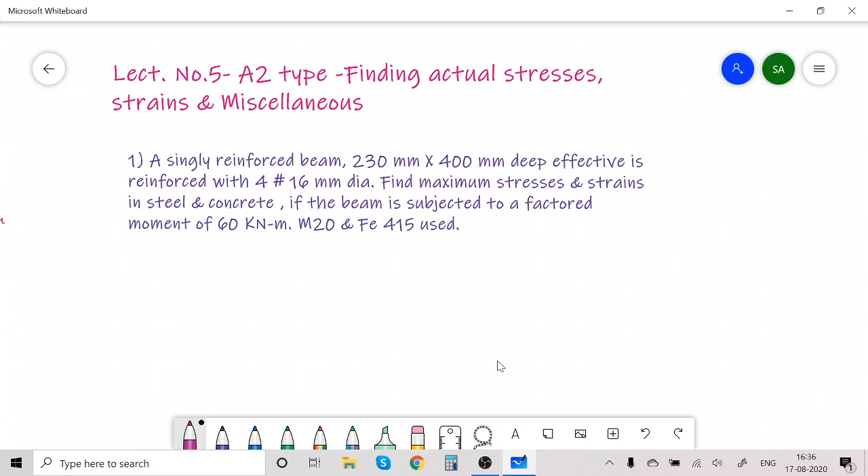Hello friends. Today in lecture number 5 of the subject RCC, we will study the A2 type problem, that is finding actual stresses, strains and miscellaneous problems. In the first problem, a singly reinforced beam 230 mm by 400 mm deep effective is reinforced with 4 bars of 16 mm diameter. Find maximum stresses and strains in steel and concrete if the beam is subjected to a factored moment of 60 kN meter, M20 and Fe 415 used.

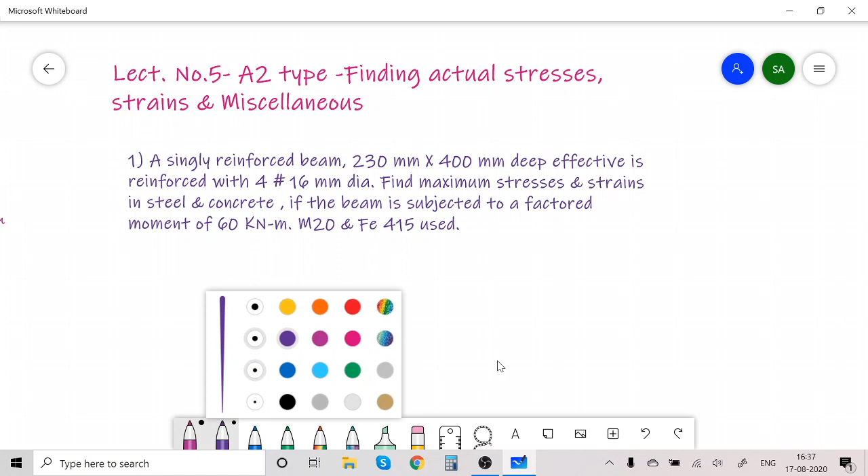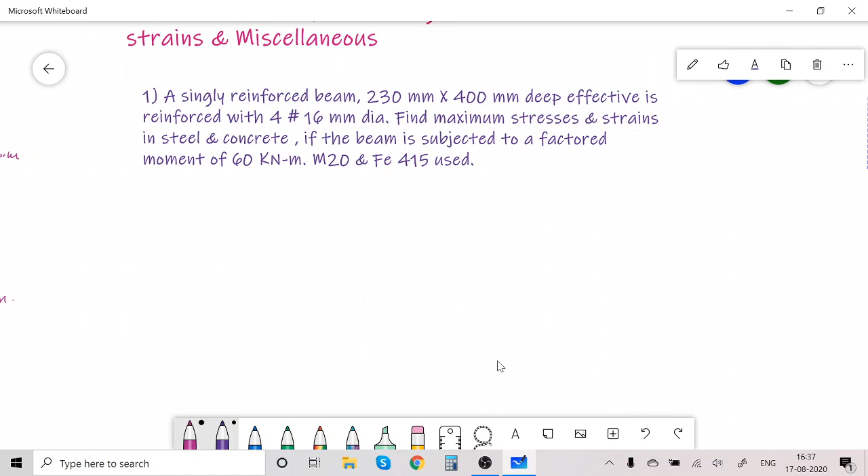Now, to start with, we will note down the given data. So, solution. Data given. B is 230 mm. Small d, effective depth, is given as 400 mm.

Is reinforced with AST, 4 bars of 16 mm diameter. So let us calculate area: 4 into pi by 4 into 16 square. So this is 804 mm square.

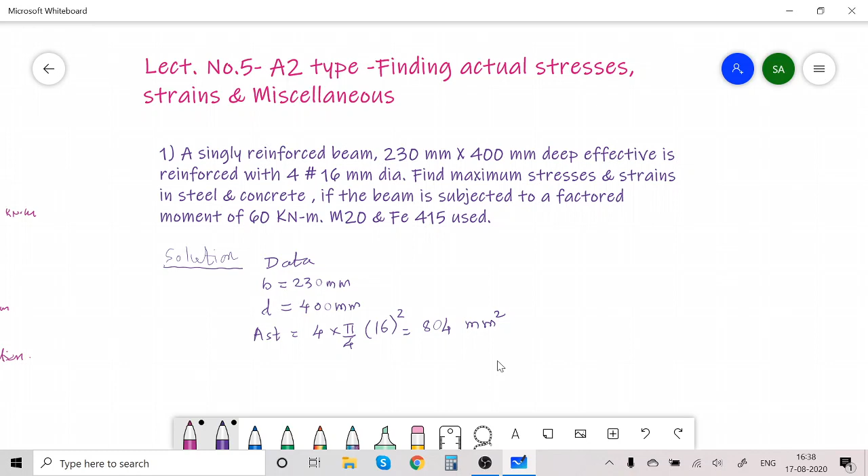Okay, then the grade of steel and concrete is given. So maximum stresses allowed, maximum stress in steel is 415 Newton per mm square, and in concrete 20 Newton per mm square. And further it is mentioned that the beam is subjected to a factored moment of 60 kilonewton.

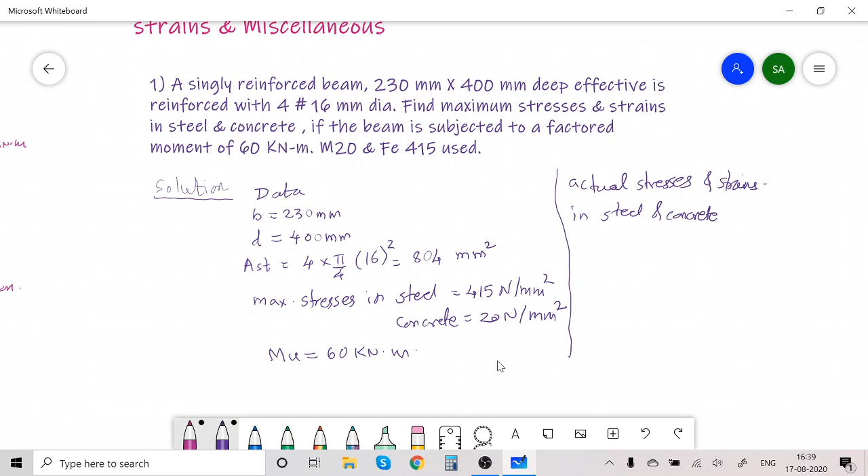What is required? The required is actual stresses in steel and concrete, stresses and strains - actual stresses and strains in steel and concrete.

Now to start with, as area of steel and size of beam is given, let us calculate XU actual by the formula CU is equal to TU. That formula is 0.87 FY AST, that is this is TU, divided by 0.36 FCK into B. XU I am taking on the left side.

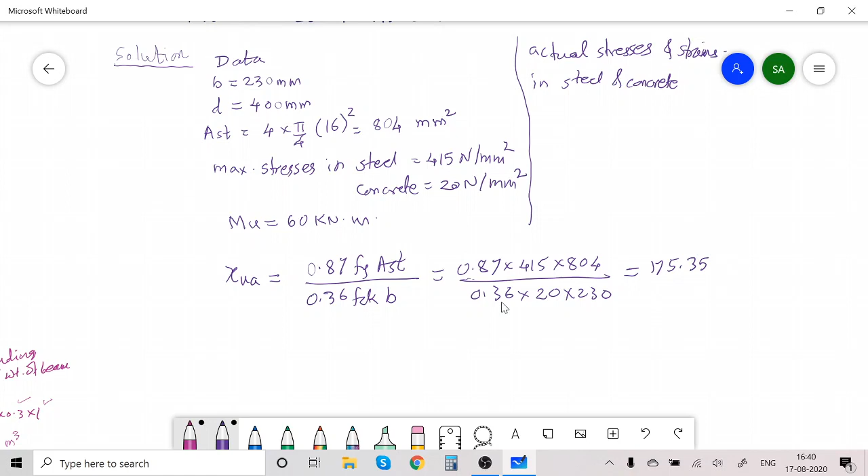So this is equal to 0.87, Fy is 415, AST 804 divided by 0.36, FCK is 20, B is 230. So after calculation, XU actual is 175.35 mm.

Then let us find XU max or XU limit. Now for the grade of steel Fe415, XU max is 0.48D. This is for Fe415 grade steel. So 0.48 into D, D is 400. So this is equal to 191.4 mm.

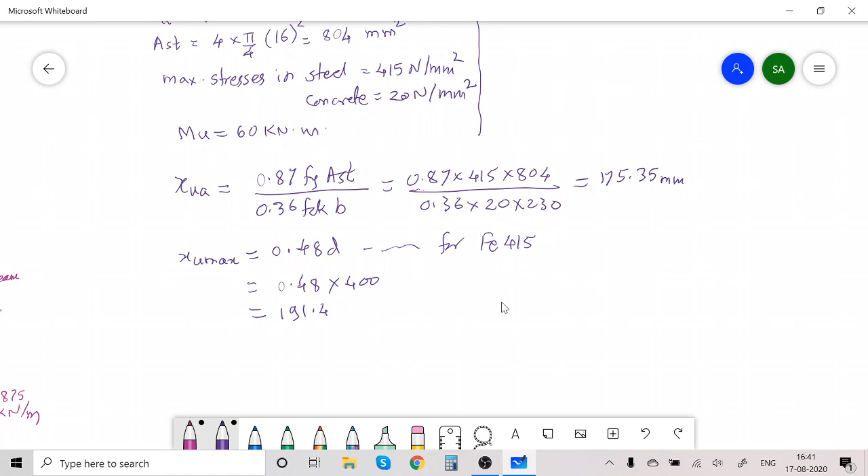Now let us compare this XU actual and XU max. XU actual in this case is less than XU max. That means 175.35 is less than 191.4. So this is under reinforced section, which is allowed. Remember, over reinforced section is not allowed. So we confirmed that it is under reinforced section.

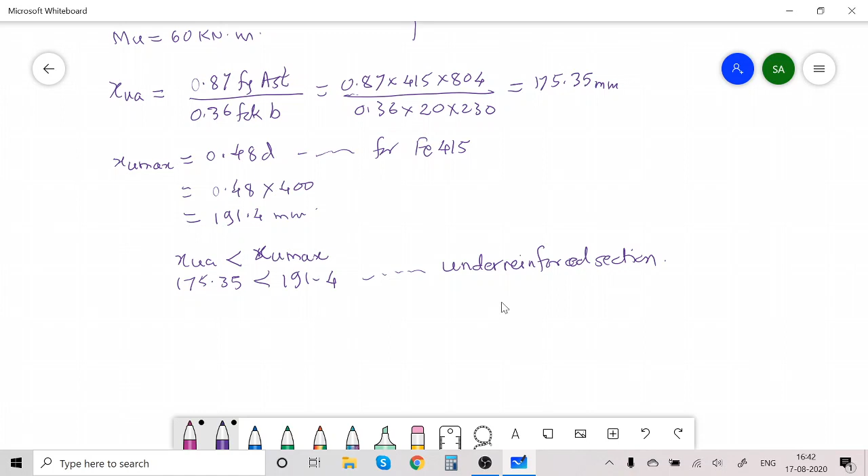Now to calculate actual stresses in steel and concrete, what I will do, I will equate Mu is equal to Tu into Z. Mu is given as 60 into 10 raised to 6. It is now in Newton mm. The given Mu is in kilonewton meter, so I have converted it to Newton mm. This is equal to 0.87.

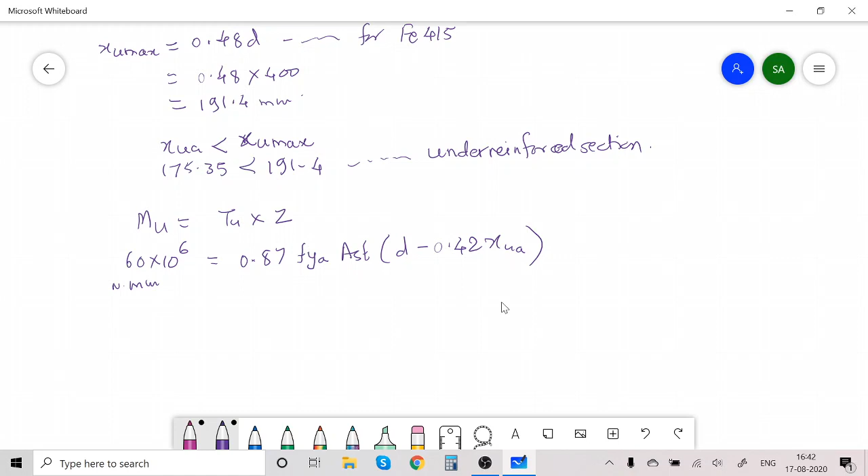Stress in steel actual, I will write Fy actual. 0.87 Fy AST into bracket D minus 0.42 XU actual, because here we will consider the actual depth of neutral axis. So 60 into 10 raised to 6 is equal to 0.87 Fy actual, stress in steel actual, AST is 804, D is 400 minus.

0.42 into 175.35. So simplify this, you will get stress in steel actual as 262.76 Newton per mm square.

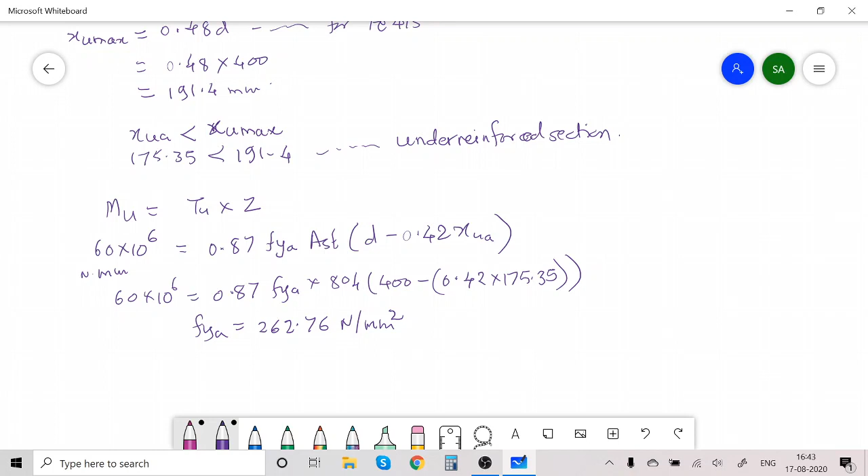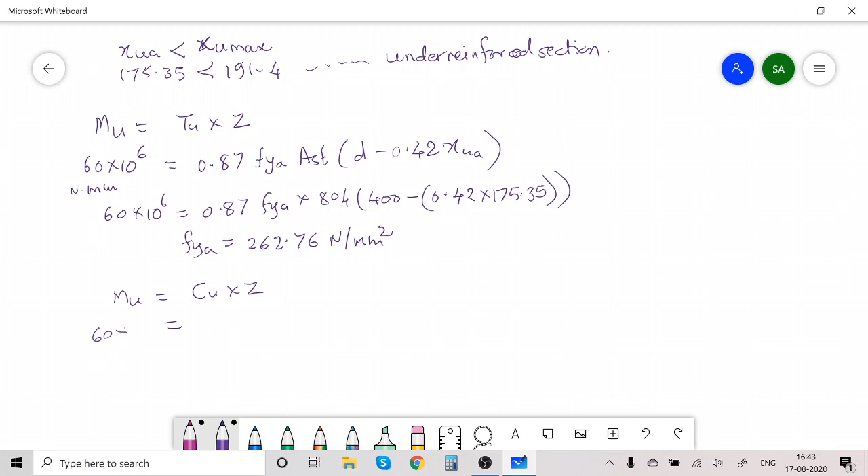Now the actual stress in concrete. For that, what I will do, Mu is equal to Cu into Z. Mu 60 into 10 raised to 6. Cu 0.36 FCK, XU actual, B, into lever arm D minus 0.42 XU actual. So 0.36 FCK actual, or you can say stress in concrete actual.

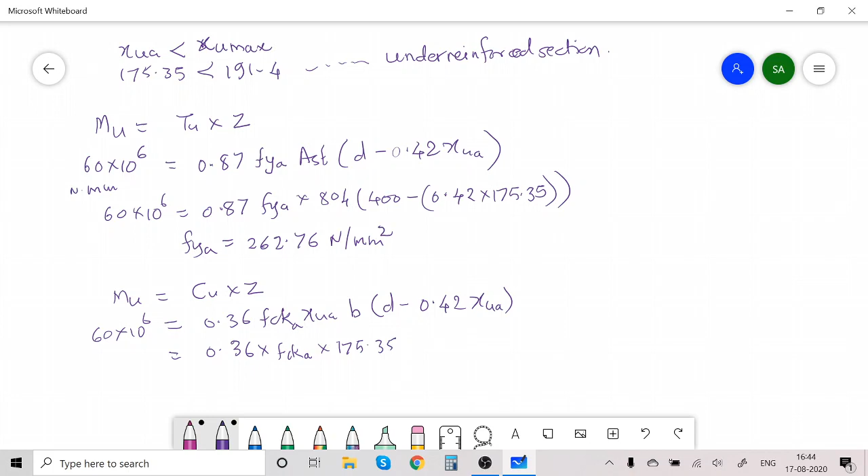XU actual is 175.35. B, the width of the section is given as 230. D 400 minus 0.42 into 175.35. So simplify this.

You will get stress in concrete actual is equal to 12.66 Newton per mm square.

But the actual stress in concrete at the outermost fiber is 0.45 FCK actual, that is 0.45 into 12.66, that is equal to 5.65 Newton per mm square. So we got actual stress in steel 262.76 Newton per mm square and actual stress in concrete 5.65 Newton per mm square.

Now about the strain in concrete and steel. The actual strain in steel, epsilon SU actual, is equal to Fy actual upon 1.15 ES plus 0.002. So this is the strain formula.

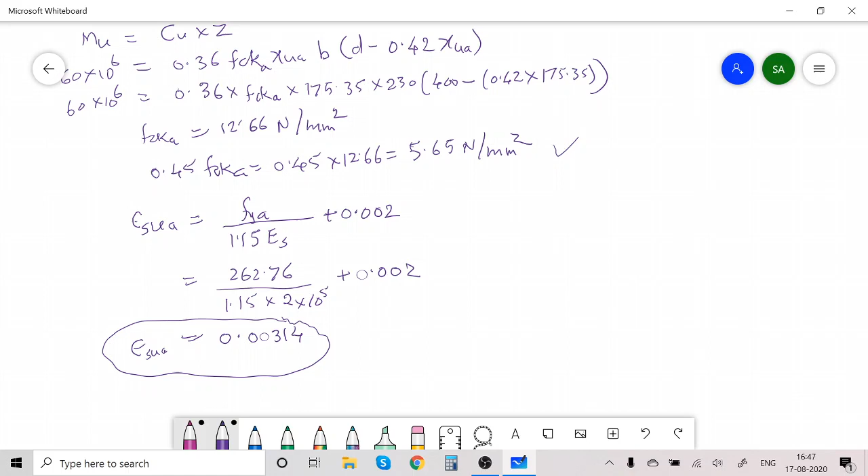Strain: 262.76 is the actual stress Fy actual, divided by 1.15 into ES, 2 into 10 raised to 5, plus 0.002. So this is equal to, after calculation, you will get 0.00314. No unit for that, because this is the strain. So actual strain in steel is 0.00314. Now, actual strain in concrete you can find by similar triangle.

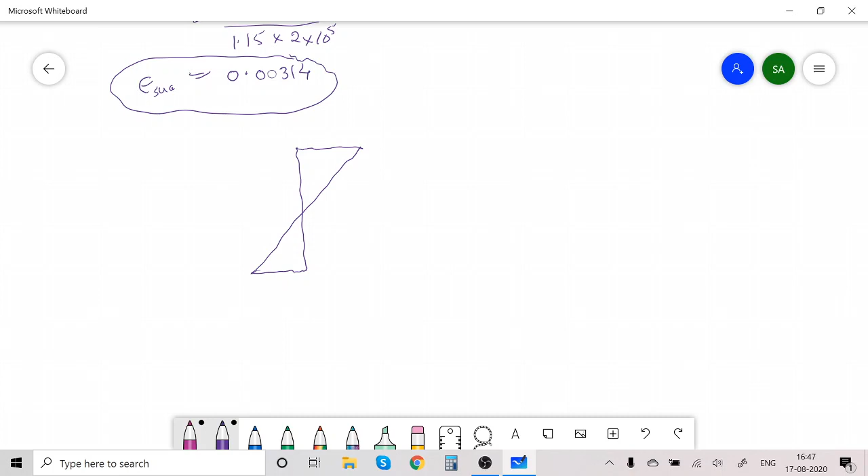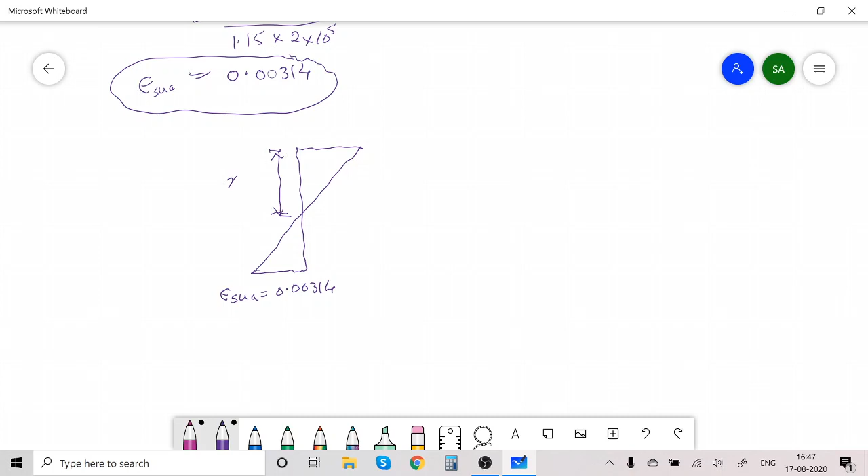See, by similar triangle we can find here the actual strain in steel: 0.00314. This is XU actual. This total is effective depth, small d. So this is D minus XU actual.

Here strain in concrete actual. So strain in concrete actual divided by XU actual, using similar triangle rule, this is equal to 0.00314 divided by D minus XU actual.

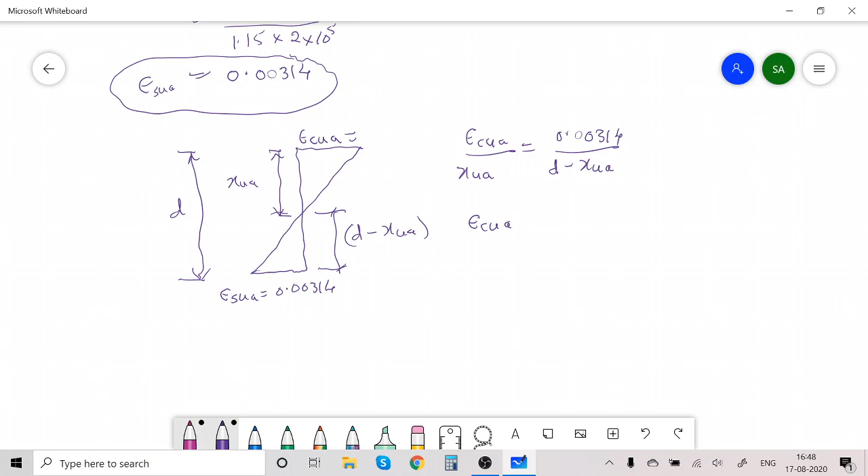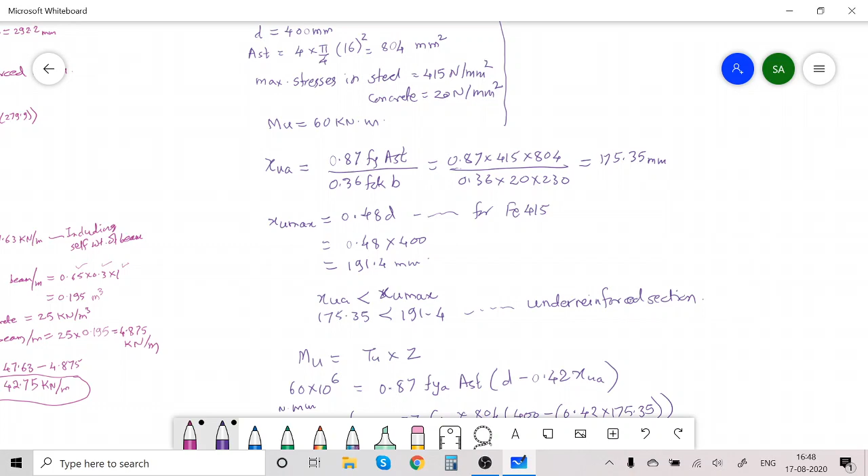Now strain in concrete actual, XU actual we know. XU actual is how much? XU actual we got it as 175.35. So 175.35 is equal to 0.00314, D is 400 minus 175.35. So simplifying this, what we will get, strain in concrete actual is equal to 0.00245. So this is the strain in concrete actual.

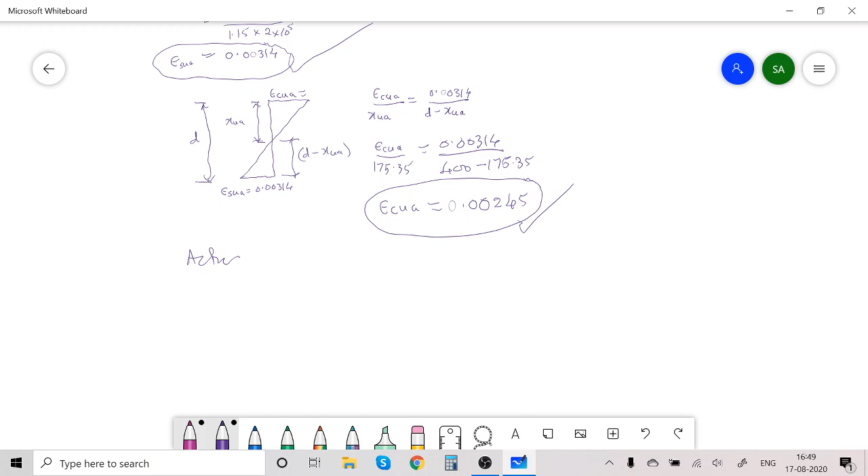This is the strain in steel actual. So the final answer I can write: actual strain in steel is 0.00314 and in concrete 0.00245. This is the final answer that we got. Very simple.

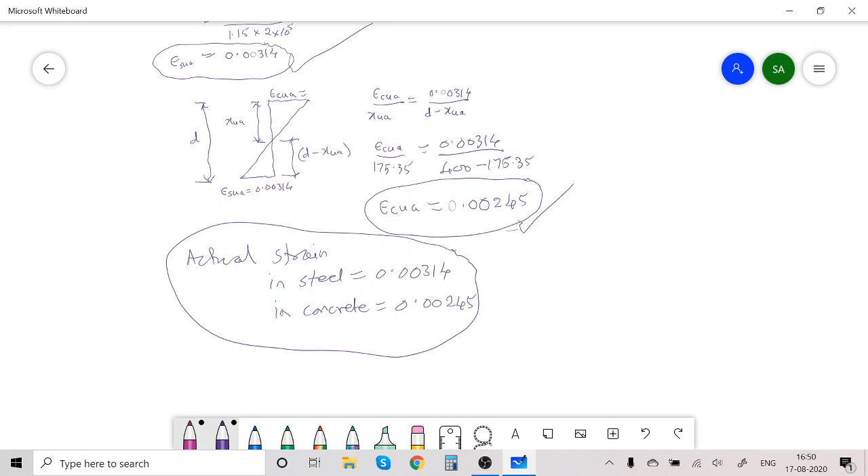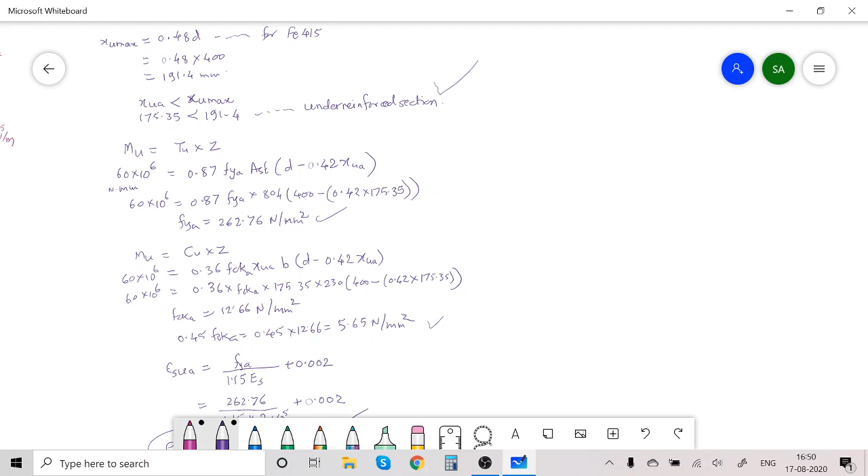What we did: we first checked whether the beam is under-reinforced or not. Then we equated the actual Mu to Tu into Z and found the stress in steel. Then we equated Mu to Cu into Z, and found the stress in concrete. Then using actual stress in steel, we found actual strain in steel. And using the similar triangle principle, we found the actual strain in concrete.

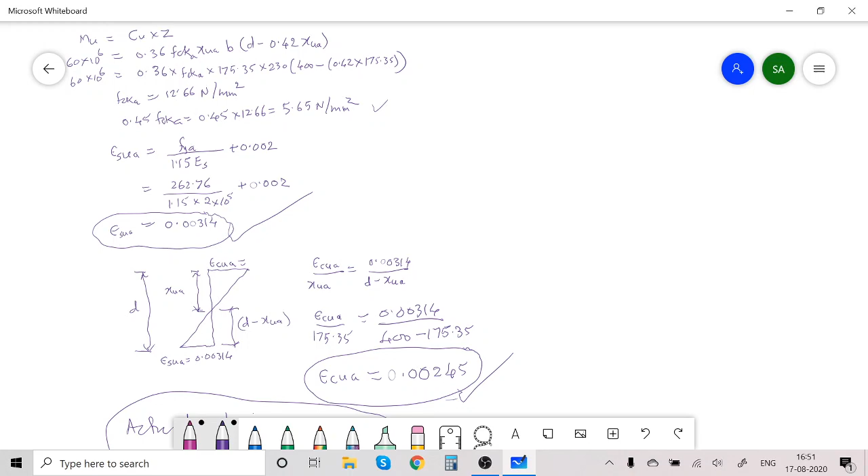So this is another type, analysis type. Now another problem, which is very simple: calculate the values of critical neutral axis and maximum moment of resistance for M15 and Fe415. Okay, now for that, let us note down the data. Only data given is M15, that is the grade of concrete, and Fe415.

Now here I will consider the strain diagram as usual. It is asked critical neutral axis, so it must be a critical section or a balanced section. Critical section is also known as balanced section. It is also known as economical section, and for this is XU max.

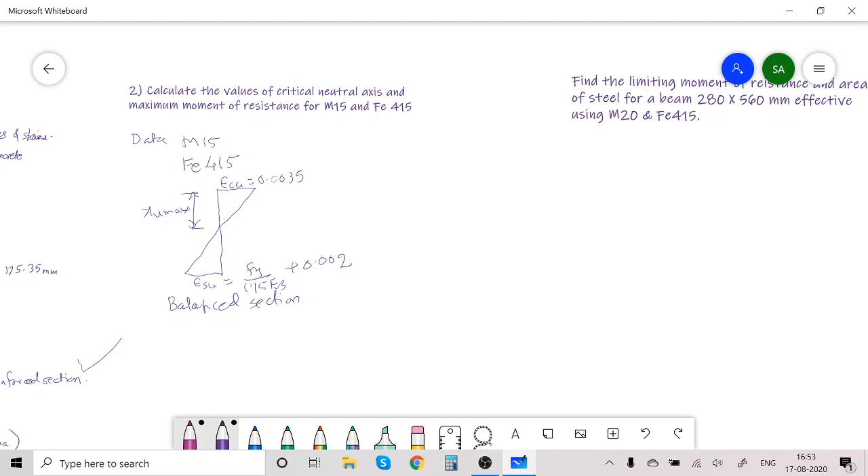And in this section, both the strains, that is strain in concrete and strain in steel, reach their maximum permissible value at the same time: Fy upon 1.15 ES plus 0.002. Simultaneously, the values of strain reach their maximum. So this is D minus XU max.

Now I will substitute the values of Fy and ES here, as it is given Fe415. So this is 415, Fy is 415 divided by 1.15 ES, always 2 into 10 raised to 5, plus 0.002. So if you simplify this, what you will get: strain in steel ultimate is equal to 0.0038.

Now using similar triangle, XU max upon 0.0035 - this is given in IS code. Both these values are given in IS code, that is maximum strain in steel and maximum strain in concrete. This must be equal to D minus XU max upon 0.0038.

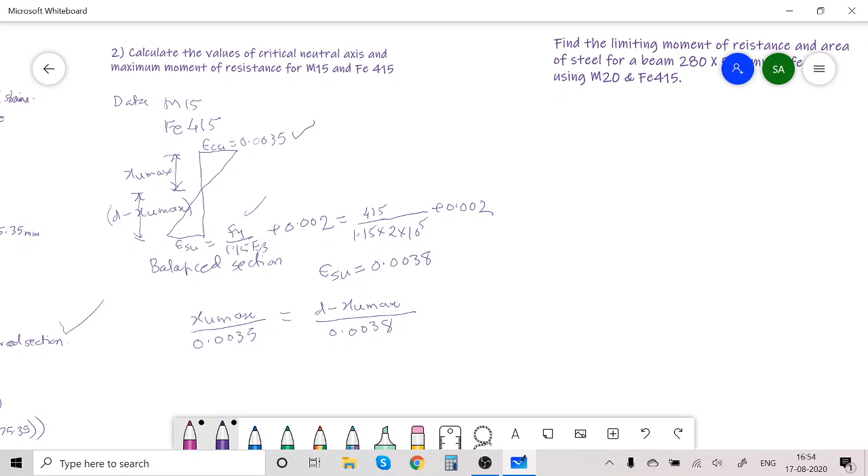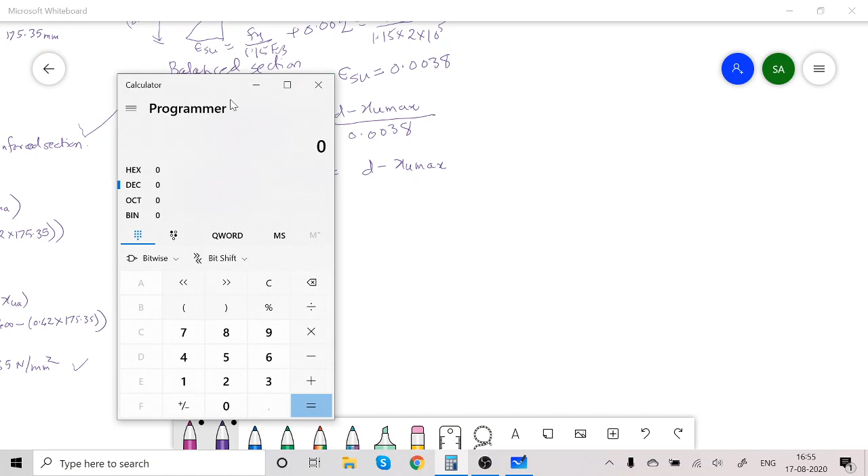So simplify this, what you will get? Take this 0.0038 divided by 0.0035, XU max is equal to D minus XU max. So you can simplify this, and after simplifying you will get XU max equal to 0.48 D.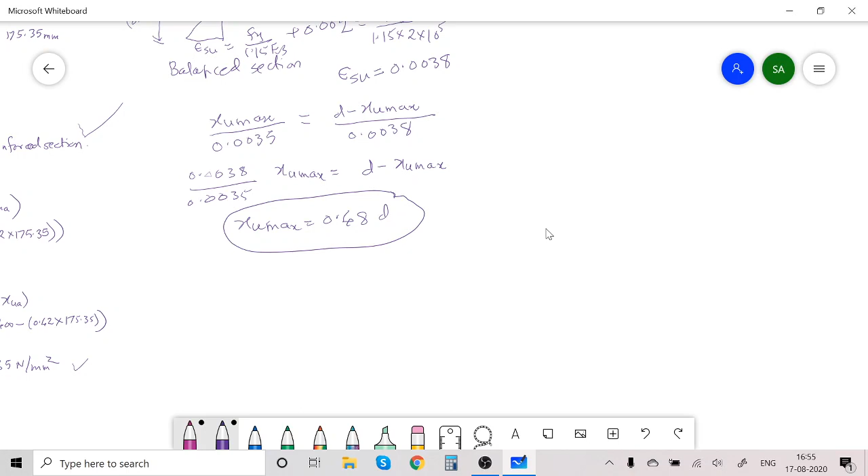Once you get XU max, using the equation Mu max is equal to Cu into Z. Cu is 0.36 FCK XU max B into bracket D minus 0.42 XU max. So 0.36 FCK, as the grade of concrete is given as 15, XU max is 0.48D into B into bracket D minus 0.42 into 0.48D.

So simplify this, what you will get: 2.066 B D square Newton mm. This is Mu max.

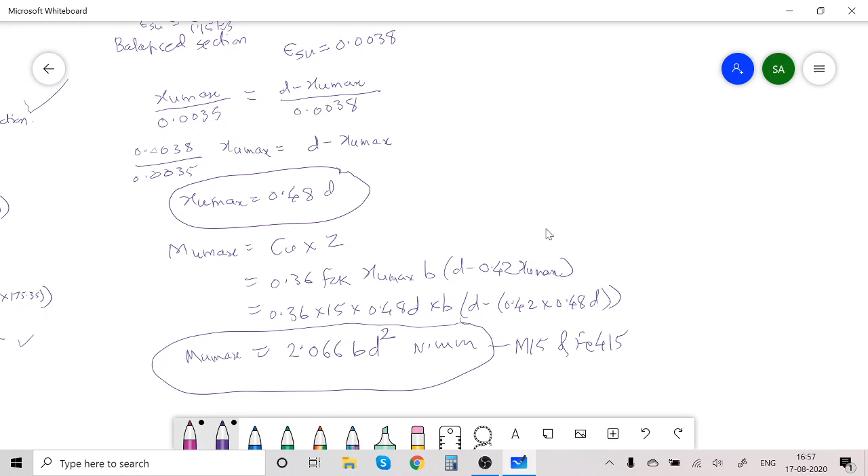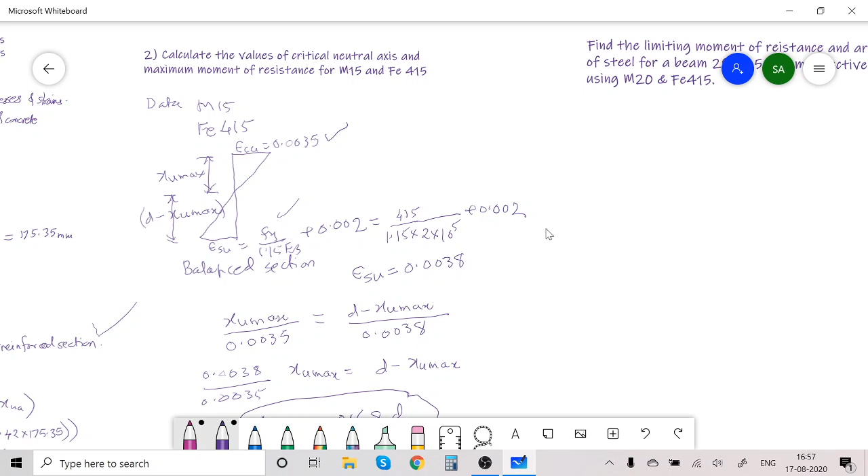Mu max for M15 and Fe415. So I will repeat the steps. Only grade of steel and concrete is given, and it is asked to find the depth of critical neutral axis, that is for balanced section, and maximum moment of resistance, that is Mu max.

Now consider this strain diagram. The maximum strain in steel is given as Fy upon 1.15 ES plus 0.002. This is given in IS code. Maximum strain in concrete at the outermost fiber is 0.0035. The depth of neutral axis is XU. Total depth from this to center of the steel is small d, effective depth. So from neutral axis to the center of steel is d minus XU max.

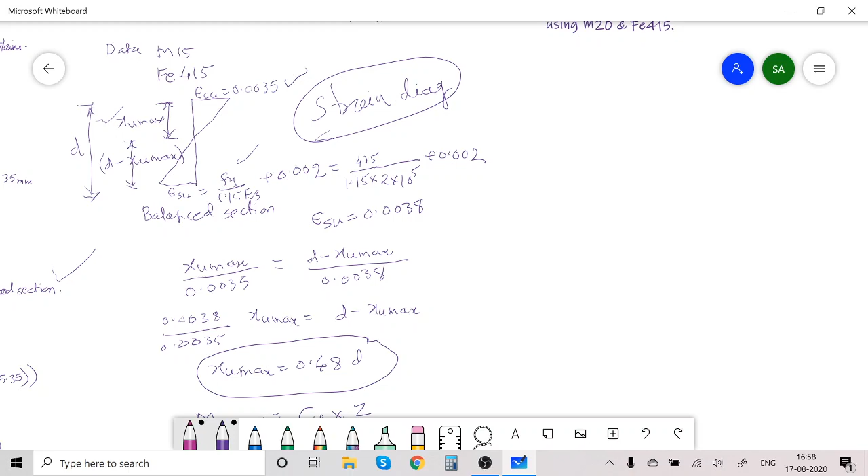Substitute the value of Fy as 415, ES as 2 into 10 raised to 5. Calculate the strain in steel, that is 0.0038. Then using the similar triangle rule, find the value of XU max in terms of D.

Then equate Mu max to Cu into Z. Cu is 0.36 FCK XU max B, and Z is D minus 0.42 XU max. Substitute the value of FCK as 15. XU max is 0.48 D.

Small d is 400, sorry, it is not given. We are finding in terms of B and D. So keep D as it is. Then again XU max is 0.48 D. So simplify this, you will get Mu max in terms of BD square, that is 2.066 BD square.

Now this is constant for M15 and Fe415. If you know the values of B, suppose B is 300 mm and effective depth is say 500 mm, then after substituting these values in this equation, you will directly get the value of Mu max.

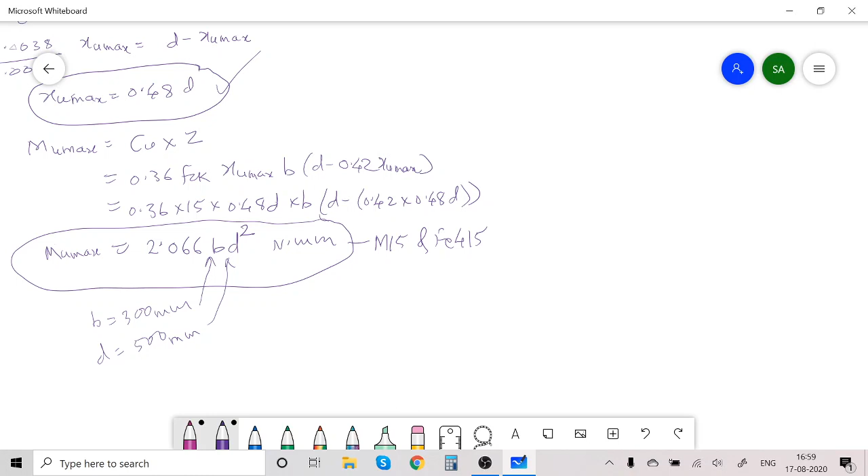Now let us consider the third problem. Find the limiting moment of resistance and area of steel for a beam 280 by 560 mm effective.

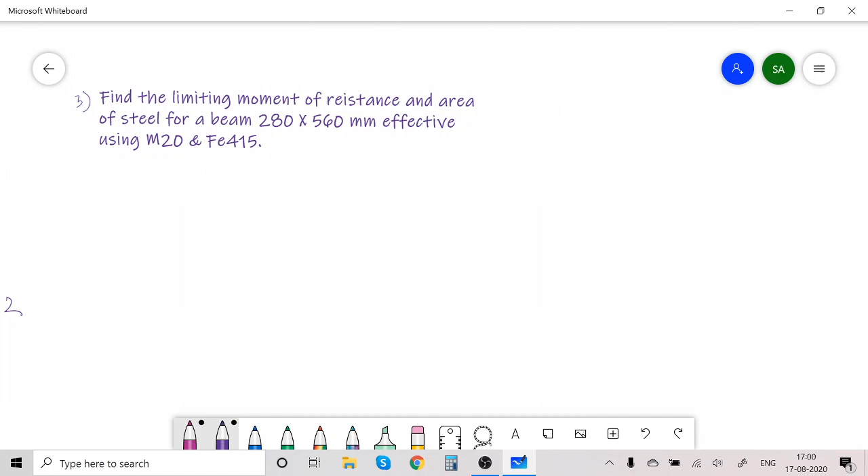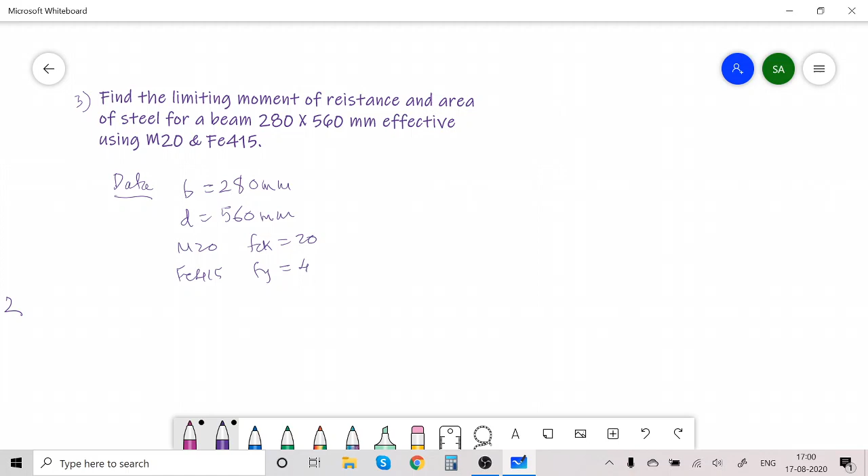Now data: B is 280 mm, effective depth small d is 560 mm, M20 means FCK is 20 Newton per mm square, Fe415 means Fy is 415 Newton per mm square.

And what is asked? Mu max and AST. These are the required parameters.

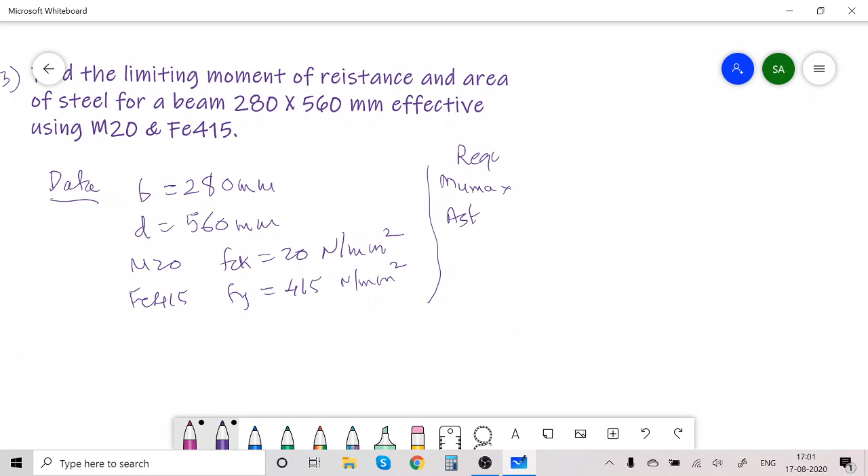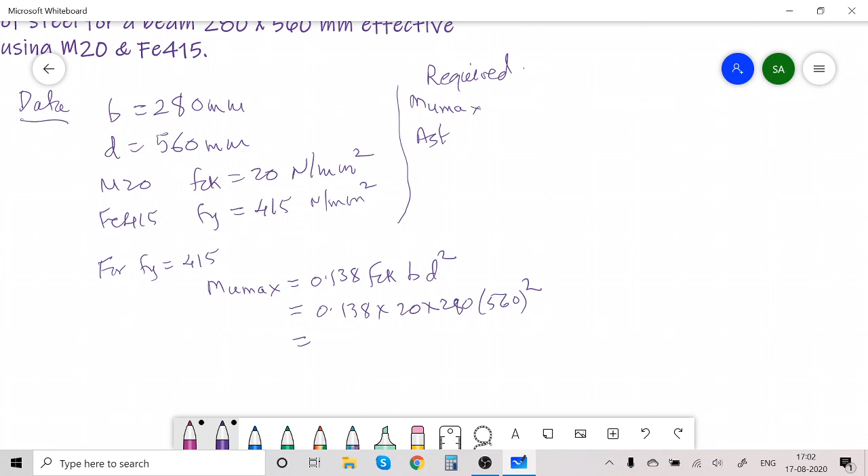Now, as the grade of steel is given for Fy equal to 415, that is Fe415, Mu max or Mu limit is 0.138 FCK BD square, that is equal to 0.138 into FCK 20, B is 280 and D is 560 square. So simplify this, you will get the value of Mu max as 242.35 into 10 raised to 6 Newton mm.

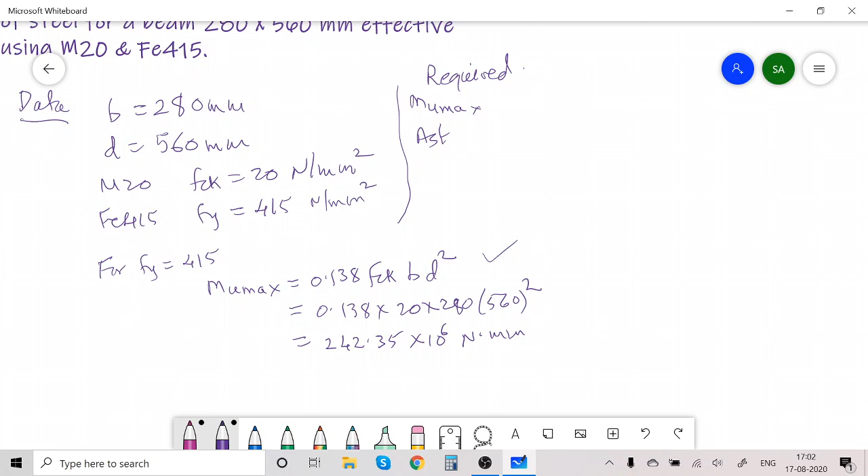This equation we derived in the second lecture, that is for Fe415. Mu max is 0.138 FCK BD square.

Now to find area of steel, what we do? We will equate to find area of steel. We will use equation Tu is equal to Cu. Tu is total tensile force given by steel, 0.87 Fy AST, is equal to 0.36 FCK XU B.

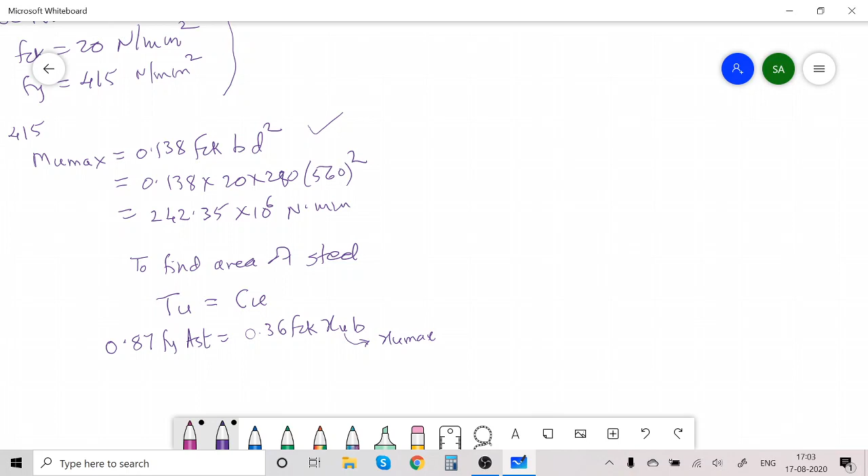Here, as this is a balanced section, we will substitute the value of XU as XU max, which is 0.48 D. So AST, we require, AST is equal to...

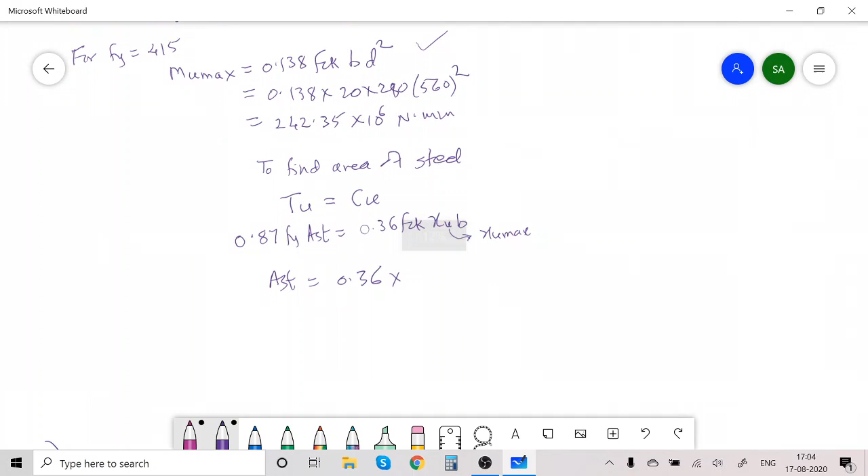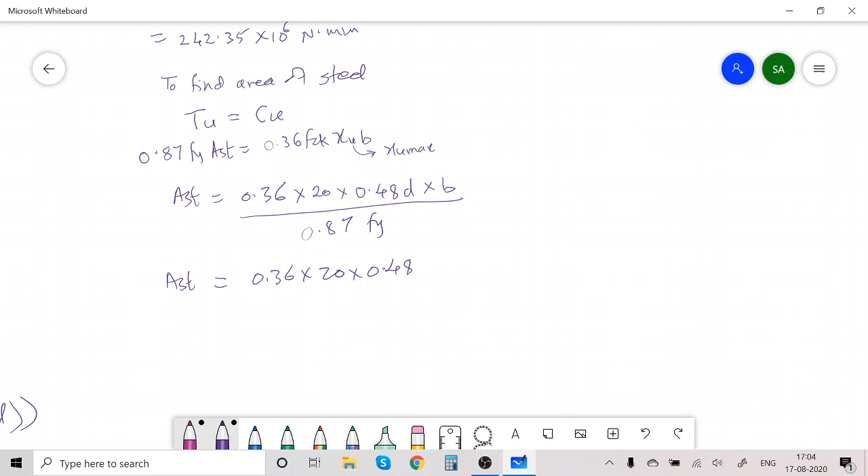0.36 FCK, what is the grade of concrete given as 20? So 20 into XU max, that is 0.48 D, 0.48 D into B divided by 0.87 Fy. So AST is equal to 0.36 into 20 into 0.48. The value of D is 560 and B is 280, divided by 0.87 into 415.

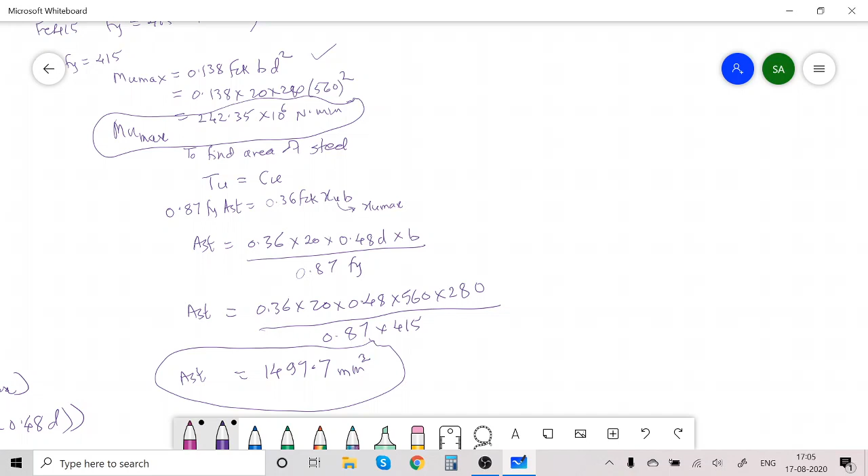So after calculation, we get AST as 1499.7 mm square. So this is the required answer. Area of steel is equal to 1499.7 mm square, and required Mu max is 242.35 into 10 raised to 6 Newton mm.

So this type of problem can be asked for 4 marks in examination.

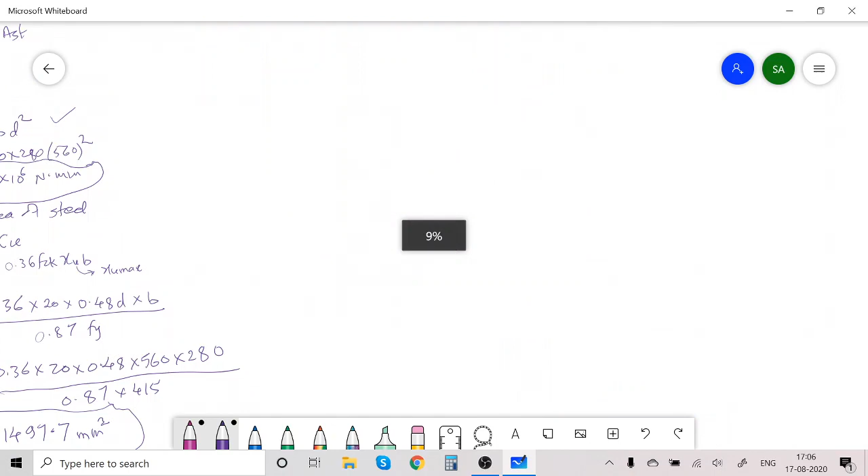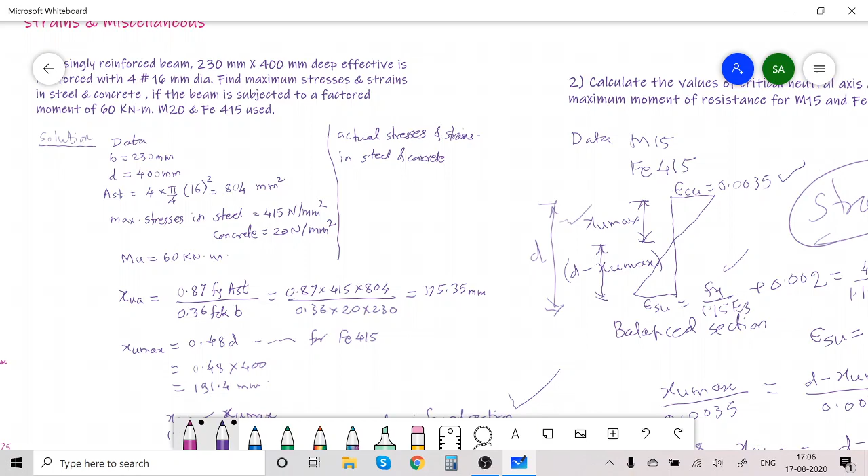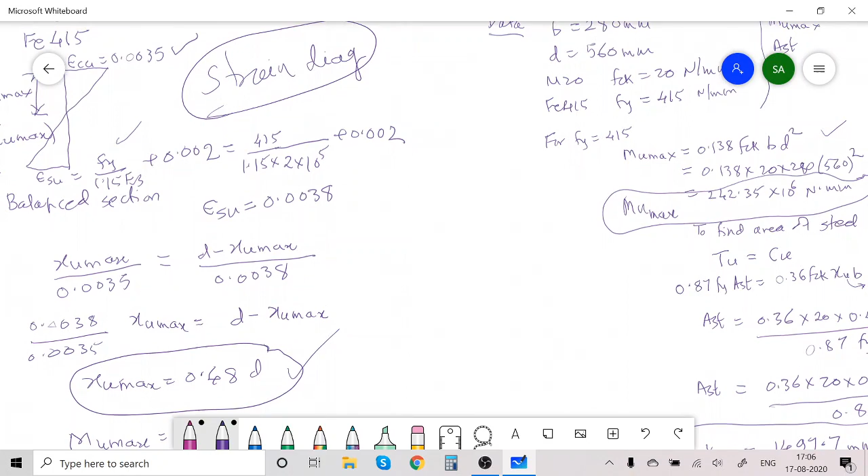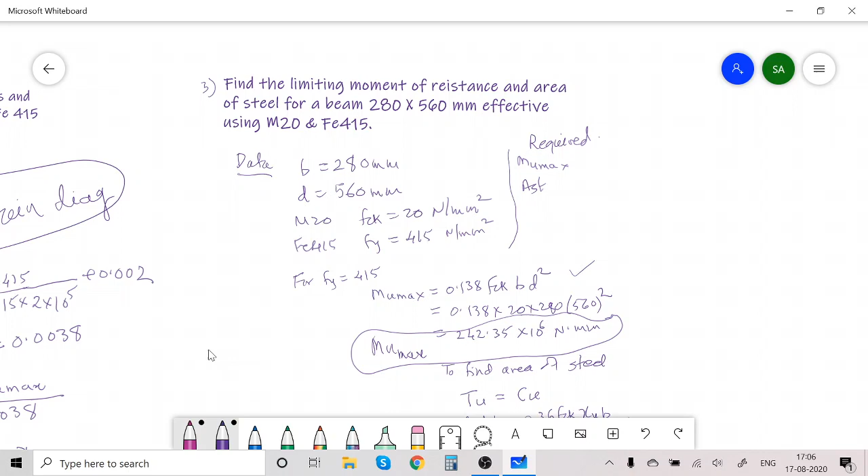So just I will summarize: in the first problem what we studied is how to find the actual stresses and strains in the beam with given Mu and the size of the beam, area of steel, and grade of steel and concrete. In the second problem, we derived the equation for XU max and Mu max for a particular combination of grade of steel and concrete. And in the third case, we found the value of Mu max with given grade of steel and concrete and size of the beam. We also found the area of steel required for balanced section. Thank you.